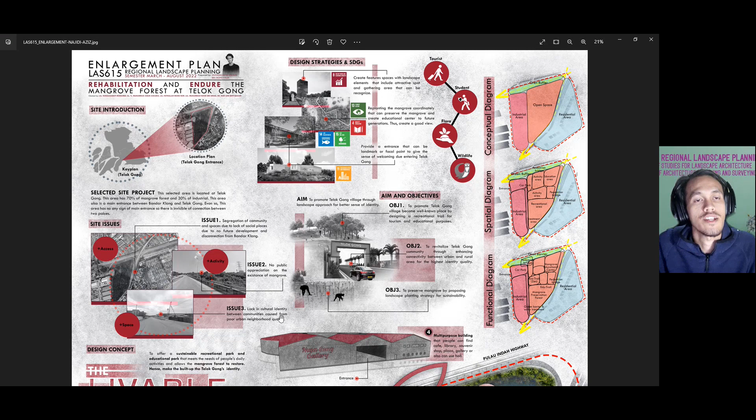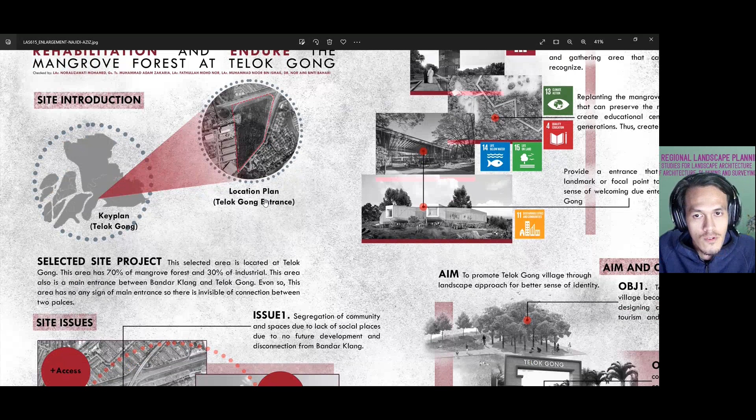Rehabilitation and Enduring the Mangrove Forest at Telok Gong. My site is between Telok Gong and Bandar Klang. That is the entrance at Telok Gong. So I picked this site for my design.

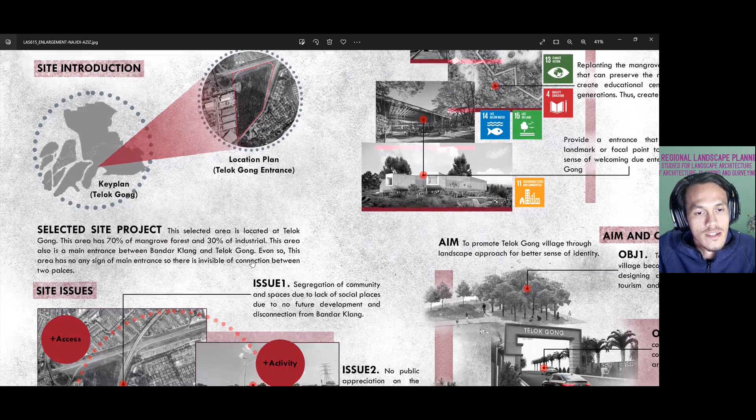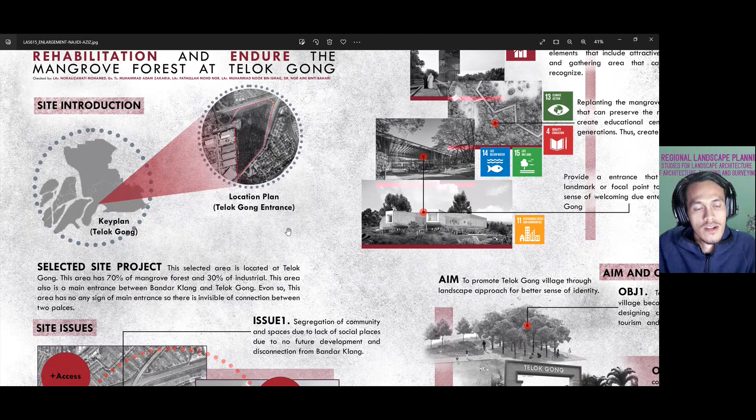Telok Gong has 70% mangrove forest and 30% industrial area. This area is also the main entrance of Bandar Klang and Telok Gong. Even so, this area has no sign of a main entrance, so there is an invisible connection between the two places.

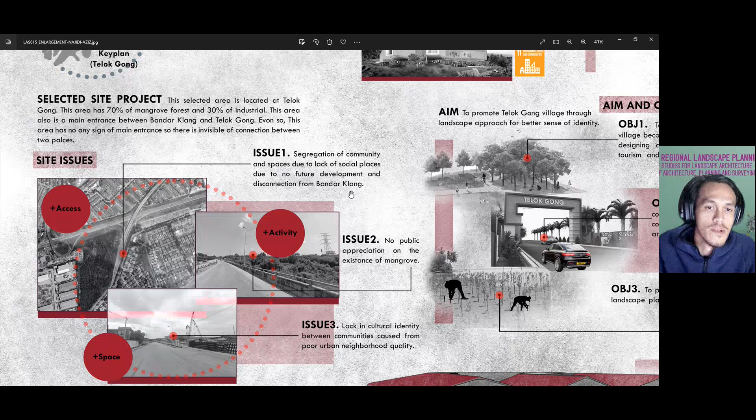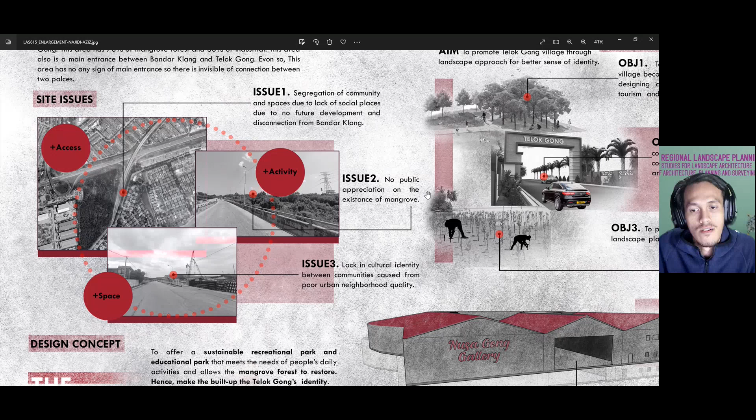So the issue is the segregation of community space due to lack of social places, lack of future development, and disconnection from Bandar Klang. Second is no public appreciation of the existing mangrove. Third is lack of cultural identity between communities, caused by poor urban neighborhood quality.

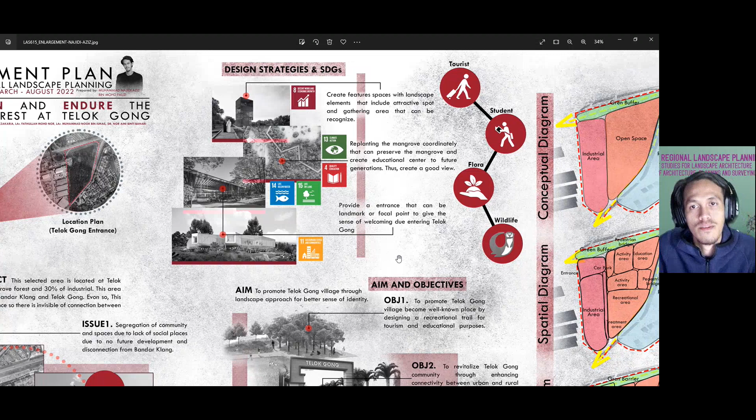The design strategy I want to involve in this design is to create feature spaces with landscape elements that include attractive spots and gathering areas that can be recognized. Then replanting the mangrove coordinately, which can preserve the mangrove and create an education center for future generations, thus creating a good view too.

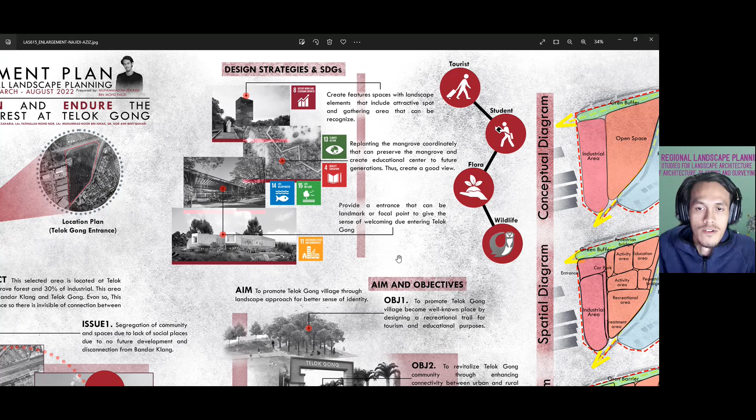Third is to provide an entrance that can be a landmark or focal point to give the sense of welcoming as you enter Telok Gong.

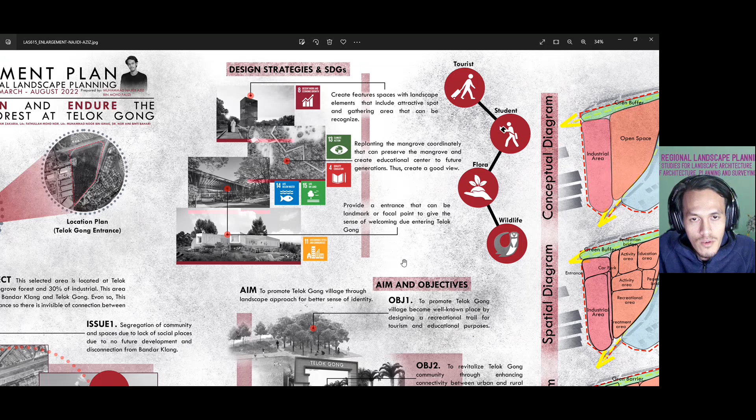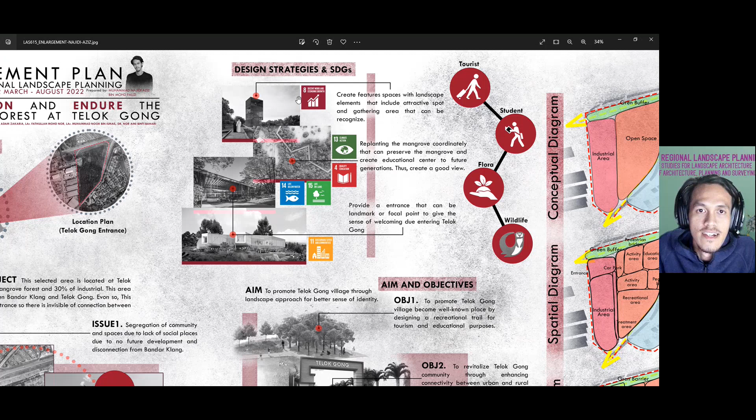The SDGs included in this project are: 8, decent work and economic growth; 13, climate action; 4, quality education; 15, life on land; 14, life below water; and lastly 11, sustainable cities and communities.

My aim is to promote Telok Gong village through a landscape approach for a better sense of identity, since Telok Gong currently has no sense of identity.

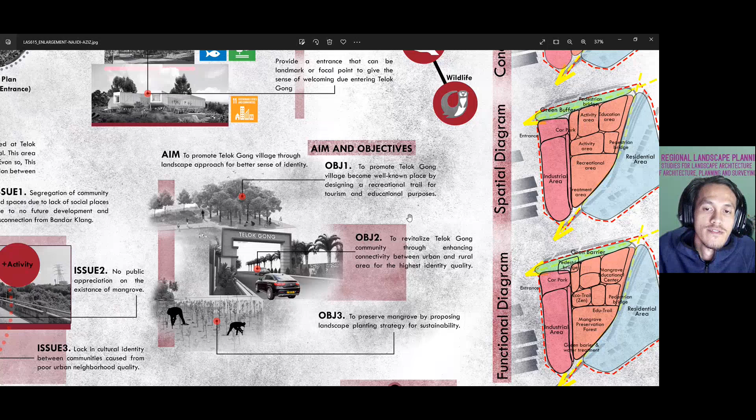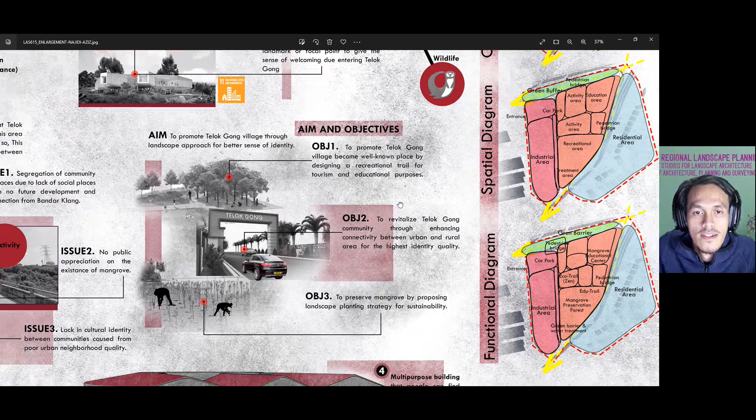Objective one is to promote Telok Gong village to become a well-known place by designing a recreational trail for tourism and educational purposes. Objective two is to revitalize Telok Gong community by enhancing connectivity between urban and rural areas for higher identity quality.

Objective three is to preserve the mangrove by proposing a landscape planting strategy for sustainability.

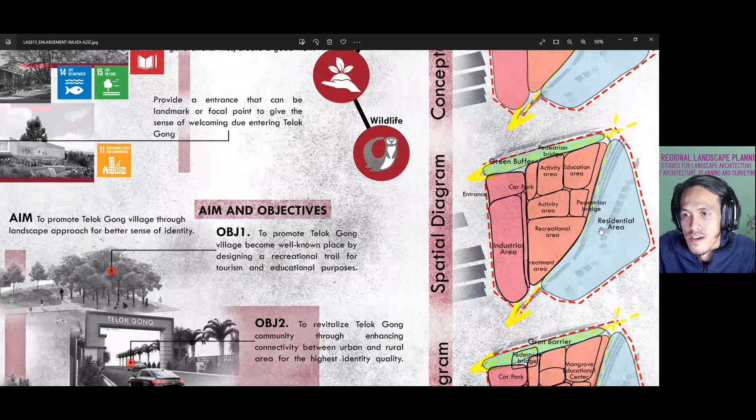This is my conceptual diagram: industrial area, open space, residential area, and green buffer. This is my exploration of the area.

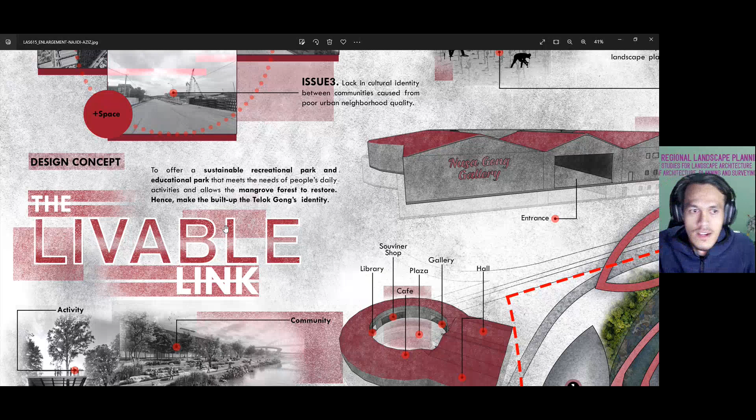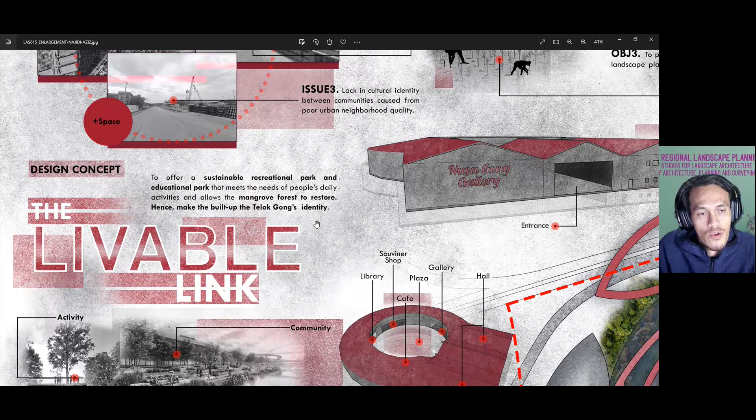Now to the concept. My design concept is 'The Livable Link' — to offer a sustainable recreation park and education park that meets people's daily activity needs while allowing the mangrove forest to restore, hence building up the Telok Gong identity.

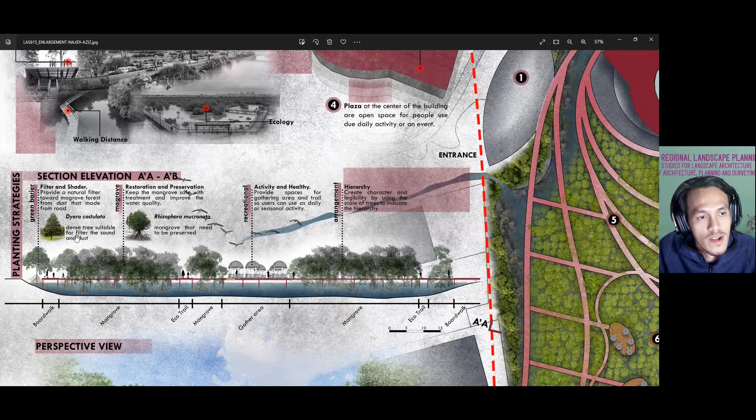This is my section and elevation. On the left there is a green barrier, and on it I would like to plant Dyera Costulata, because this tree has dense shade that can filter dust and noise. Second is the mangrove — there is existing mangrove in this site that we need to preserve.

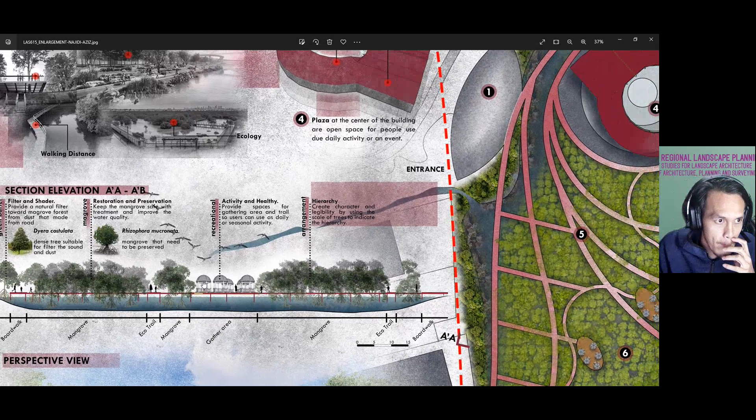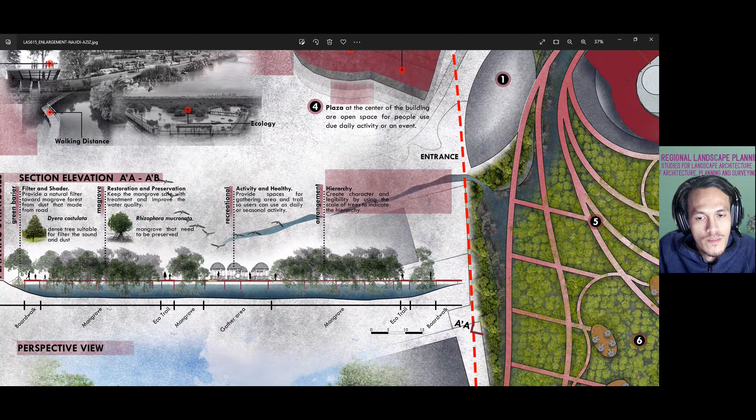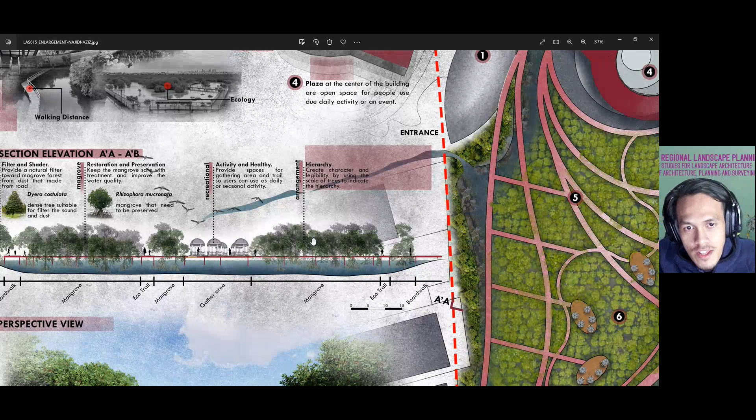The recreational feature I provide in this site is a dome on the decking so people can enjoy the good view. The arrangement of plants follows a hierarchy to create character and legibility, using the scale of trees to indicate the hierarchy.

This is my section A'A and A'B, shown here. My planting strategy is combined with the section elevation I mentioned before.

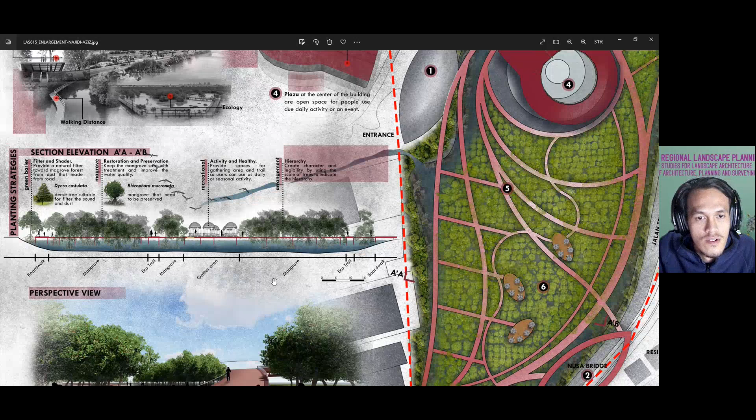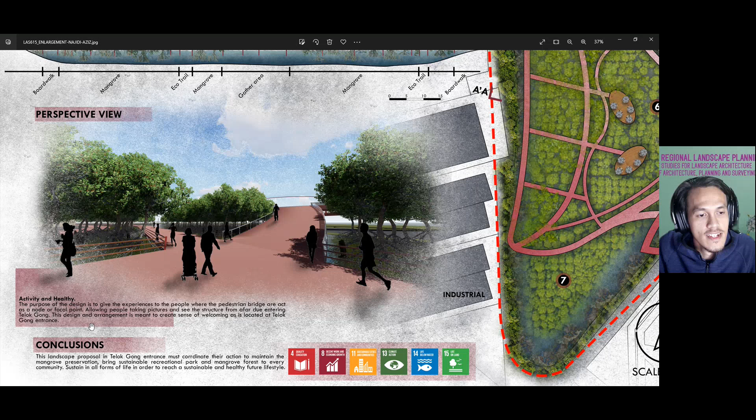My perspective description is 'activity and healthy.' The purpose of the design is to give people an experience where the pedestrian bridge acts as a node or focal point, allowing people to take pictures and see the structure from afar while entering Telok Gong. This design and arrangement is meant to create a sense of welcoming, as it's located at the Telok Gong entrance.

So for the conclusion, this landscape proposal at the Telok Gong entrance must coordinate actions to maintain mangrove preservation, bring a sustainable recreation park and mangrove forest to every community, and sustain all forms of life in order to reach a sustainable and healthy future lifestyle.

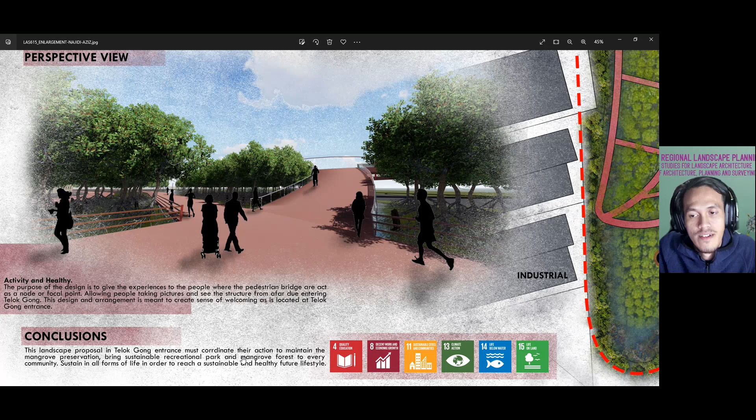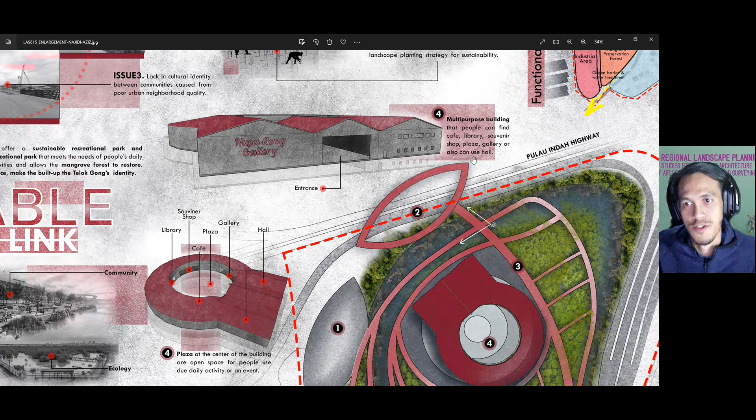This is the library and gallery that I created on my site. This is a multi-purpose building where you can find a cafe, library, souvenir shop, plaza, gallery, and also a hall for activities.

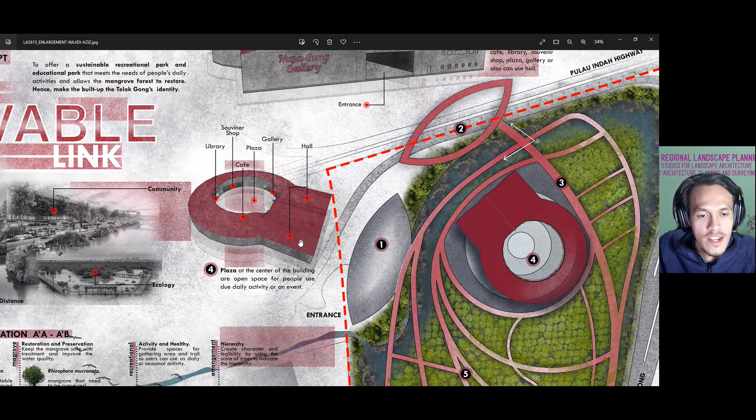This is the label of the section in the building. At the center is the plaza, an open space, so if any activity is held by people, they can use this open space.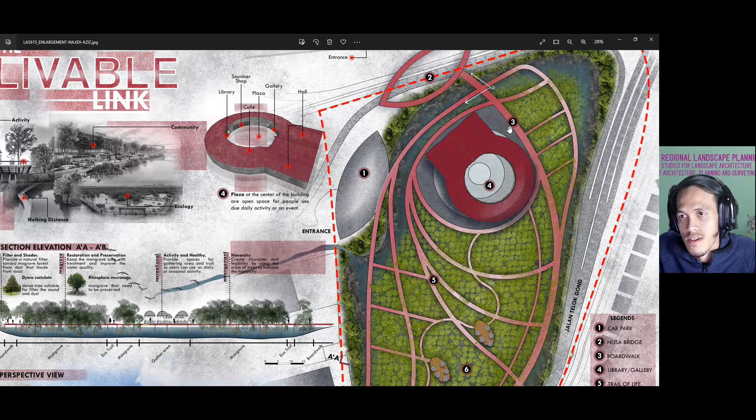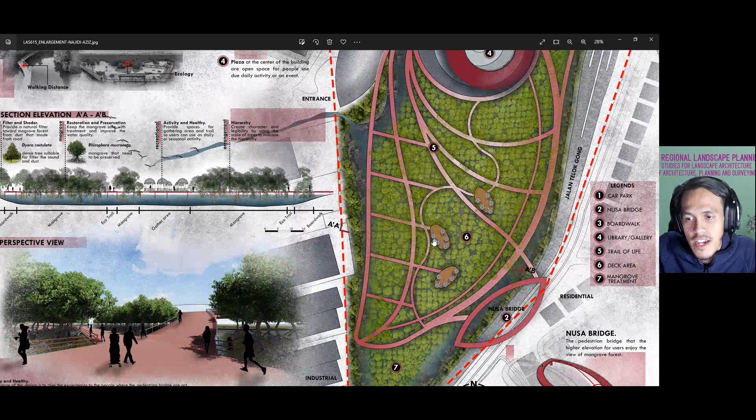This is the master plan. Number 1 is the car park. Number 2 is the Nusa Bridge, which I also propose based on my design. Number 3 is the boardwalk. Number 4 is the library and gallery. Number 5 is the Trail of Life. Number 6 is the decking area. Number 7 is the mangrove treatment.

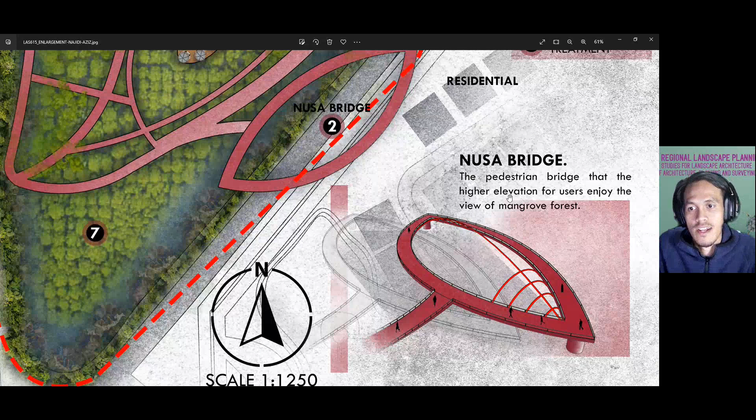This is the Nusa Bridge that I propose — a bridge that can attract people from afar. So that's all for me. Thank you.